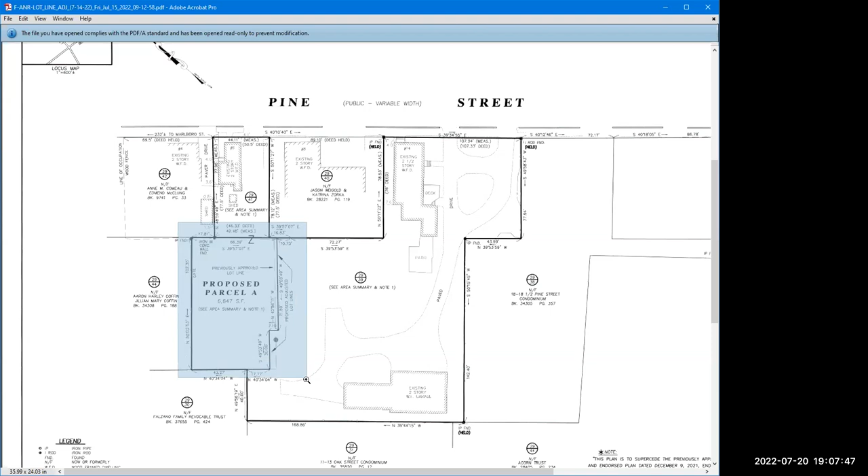Just going to zoom in on that. This very slight adjustment right here, just to accommodate this feature here. So that's all they're doing, is to change that alignment from the plan as it was previously aligned. And the office recommends endorsement of the plan. Any questions or comments?

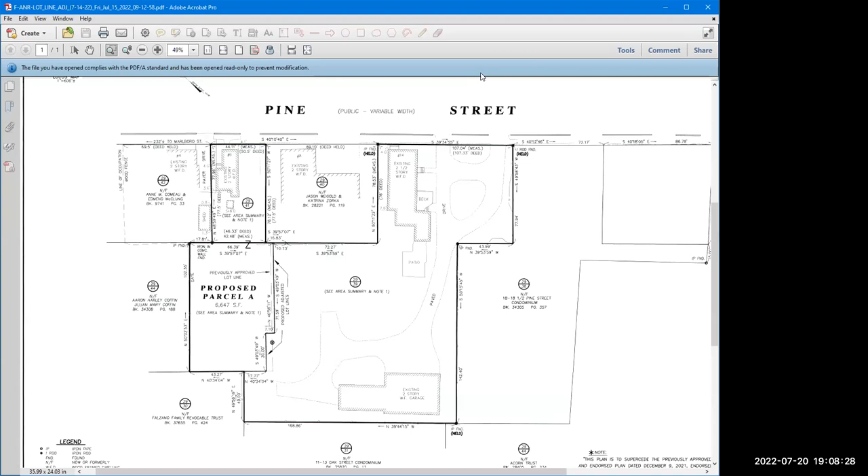I'll take the motion to approve. To endorse, sorry. I move to endorse the plan. Second. Okay, I'll call roll. Alden, yes. Beth, yes. Bob, yes. Heather, yes. Rick, yes. Richard? Hello, Richard. I muted myself, yes, sorry. Yes. Okay, Bonnie, yes. So that's endorsed and good to go.

Now, request for minor modification at 13 Doyle Drive. We don't have anybody here representing the applicant. They were going to show up tonight, right? Correct, I believe they're online. Vincent, do you want to address the board? I can pull up the plan and any other visuals that we have that you've submitted. Sure, that'd be great.

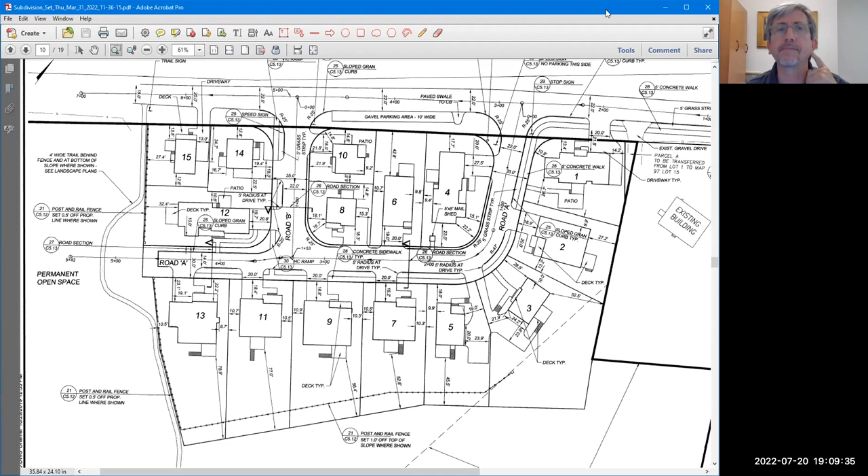Let me start with the context of the subdivision, just so everybody knows what lot it is that we're talking about. Can you all hear me? Yes, okay, sorry, we have to talk very close to these microphones. So this is the plan of the OSRD Colby Farm Lane. I'm zoomed in here to the lots that are for development purposes, not the open space surrounding it, which you can see at the bottom. The lot in question is actually this lot right here, so we'll be taking a look at the layout of that one in just a moment. I'm just going to switch to that.

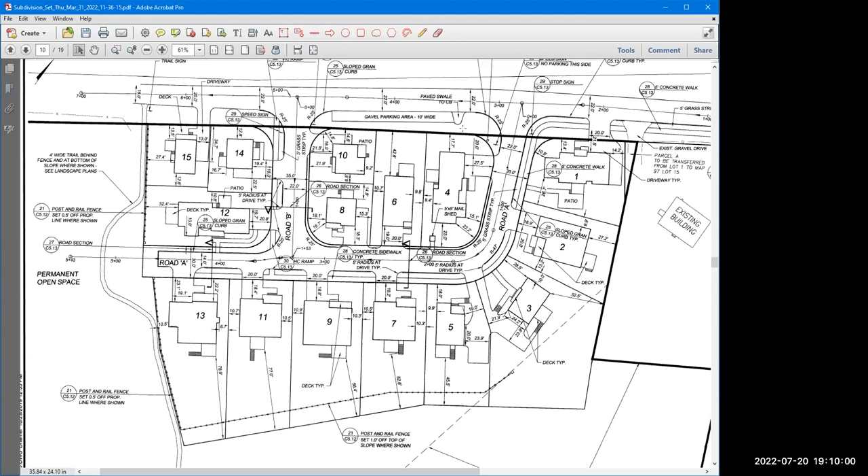And then Vincent, did you want to give an overview from this plan here of your lot, of what you'd like to do for the board? Yeah, so the kind of rectangular yellow figure right there, we're looking to put in, it's essentially a plunge pool. It's kind of small, but it's 13 feet long, 7 feet wide. It's within setbacks, and it's just going to be set off from the side of our deck, which you can see on the plan there. It's 3 feet into the ground, so it's really more of a, I guess you'd call it a glorified hot tub. That's a little nicer.

Sorry, I was just looking for a graphic that you had submitted. No? We did. Sorry, got a crying baby here. No, that's quite right. I thought you had actually submitted a rendering and that we had it here. We did, yeah, I could try to look for it again, Andy, if you need us to resend it. That's right, I'm not seeing it here.

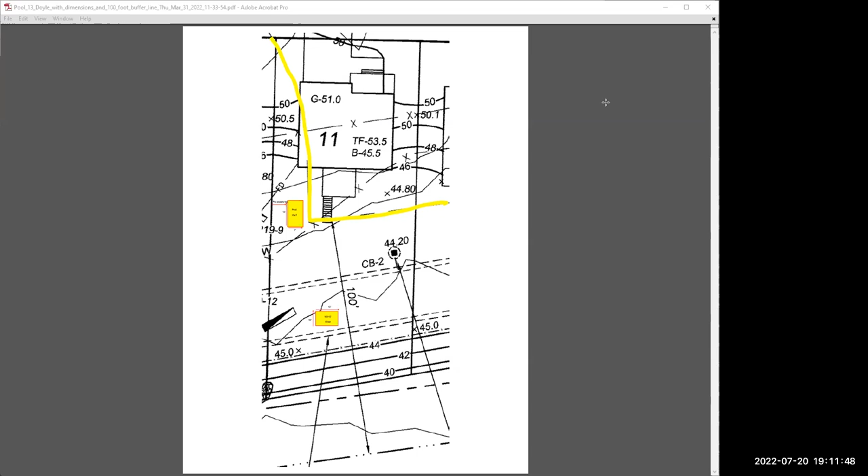Essentially, within the setbacks, we're just looking to put this in, and our HOA has approved it. I believe Dave Daly, who's a developer who still has the open permit, has co-signed it as a minor modification. So we're just looking for approval to put that in, if at all possible. Thank you.

For the board, as mentioned in the staff report, part of the reason the applicant's here is because with these smaller lots in the OSRDs, applicants are looking for a waiver of elements that might be placed within the 100 feet of the wetland resource area. That goes back to a provision in the zoning ordinance, so the board just has to review and approve that. I had an exchange with the conservation administrator, and it's our understanding that the commission, although it hasn't formally approved this yet, does not anticipate having any issues with it.

In fact, the issue attempted to be resolved in the prior weeks leading up to now, and Vincent knows this because he's been waiting on hold, is that Daley's been finishing some punch list issues. Daley agreed to sign on to this and add it in reference to their open permits, so we would not have any open overlapping permits between the owners of this lot and the developer who's still completing their punch list. So the Conservation Commission is expected to review and approve the same plan you see here.

Could you clarify on the diagram where the 100 feet back from the wetland buffer area line is? Sure, so this distance right here is 100 feet from the wetland, which is down here, to the rear of the lot. There's a 100-foot marker right near the shed, labeling this line going up. So that's the 100 foot line from the wetland, and the pool is right on the edge of that. Yeah, so if you look, it's just labeling that line right there. But where the pool is, it does require a waiver.

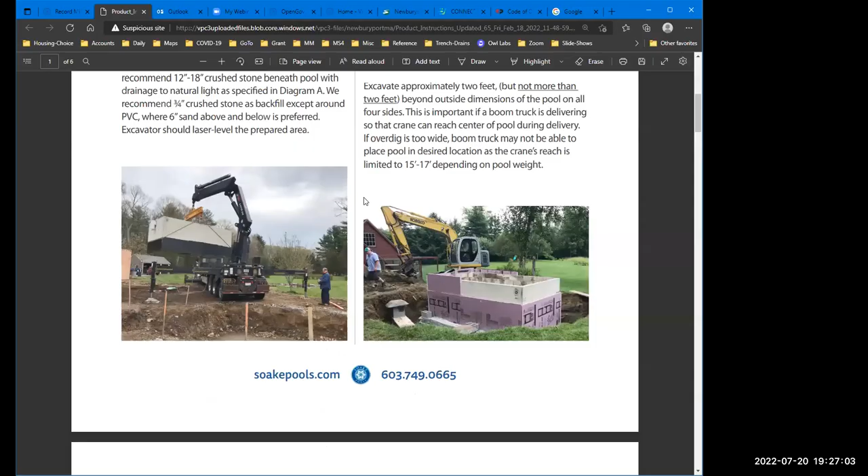This is that graphic I wasn't able to locate. Oh yeah, this gives you an idea of the scale. Obviously, most of this is submerged.

Can I ask a follow-up question? I noticed that there was also going to be the addition of pavers and a fence. I'm just wondering if there are dimensions for if there's going to be a patio surrounding the pool.

Yeah, we're actually just going to do a little catwalk around it, which would probably be about 18 inches of pavers around the perimeter of the pool itself. The pool also comes with a cover with a lock, which we'll have on, but we're also putting a fence between us and the neighbor to be in compliance with fencing requirements for pools.

Is there lighting in the pool? Will there be lighting? Yeah, we'll have just kind of little lights around it for safety reasons and ambient lighting at night. And the pool itself, I believe, has a light in it as well.

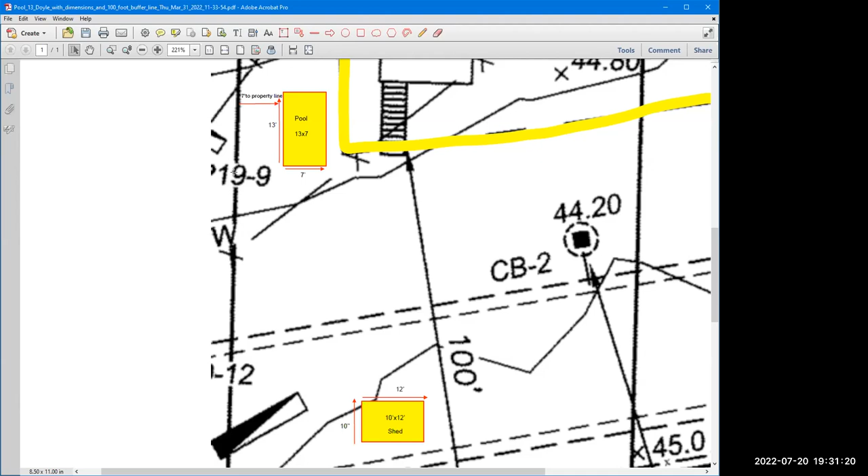But it's not shown on that. That's correct, it's not shown here, no. I do know that the applicant has spoken with Jennifer and with Caitlin, and I had asked for a plan that shows sufficiently - this is what resulted from that discussion about a plan of the improvements.

Let me try with a motion. Well, are there other people who want to speak? I don't want to just limit it to us. Richard, do you have anything to add? No, I've been listening intently. Bob? Nothing to add, Bonnie. No.

So I'll make this motion and we'll see where it goes. The motion is to consider the request for modification minor, to approve said minor modification request and waiver request for 13 Doyle Drive pursuant to the Newburyport zoning ordinance section 14J822, with the condition that no swimming pool permit shall be issued until the Conservation Commission approves a certificate of compliance for the original OSRD subdivision.

And also, actually, I thought this was saying the opposite of what you were saying. Sorry, I interrupted. It says no permits can be issued until they comply with all the conditions. That is the language suggested in the staff report. Well, let's keep it in there. Okay, so it approves the certificate of compliance for the original OSRD subdivision and also approves the instant waiver request to build a pool at 13 Doyle Drive within the 100-foot wetland buffer of this OSRD.

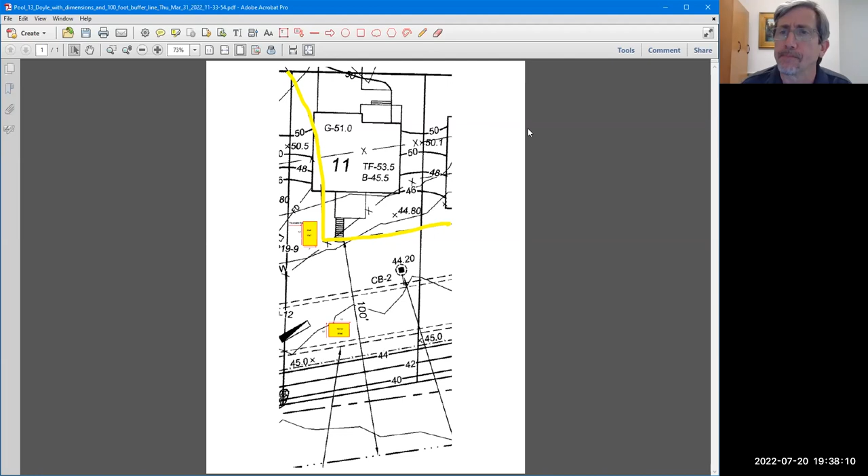I guess, what are the concerns? I'd like to know the environmental concerns, what the actual concerns are. I'd like a list of them. Yes, so would we. We are concerned because we are not experts on this, and we want to have the advice of the Conservation Commission.

So you're basically concerned about a 3-foot deep hole in our yard? Look, we don't have any more information than you do about the environmental impacts. We want to make the right decision, because this is the kind of decision that can set precedent for other applicants.

Other applicants who say, oh, you let them go into the buffer zone, now you're saying we can't do that. So we are not the experts on the environmental impact of building in or significantly disturbing land in the buffer area. So we would like you to go to the Conservation Commission and get their approval first, which is what we had agreed to do back when you first put in this application to us. And we would feel a whole lot more comfortable moving forward with their expertise telling us what's the right thing to do here.

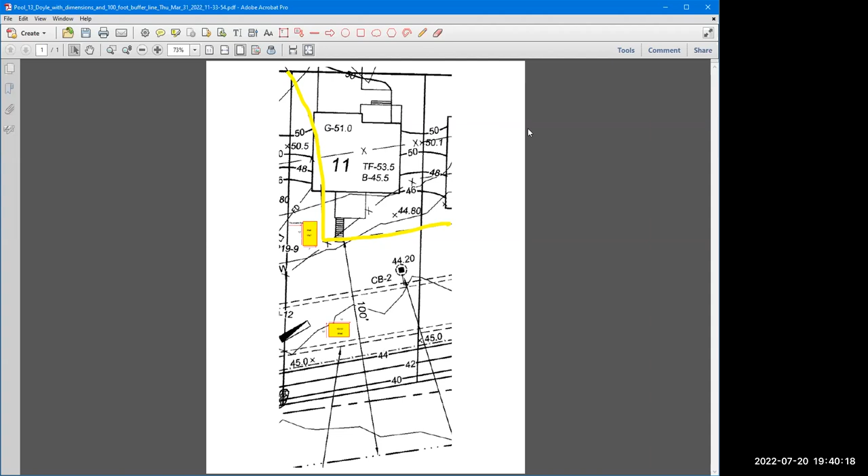So we'll move on to the next application on our general business, which is a request for a minor modification at 25 Duffy Drive. And we have the applicant with us, who's been very patiently waiting. Thank you so much. Just a moment.

Andy, is the mic on up there so you can speak into it? Yes, if you speak in the mic, that should be working. Yes, you're on, go for it. So you are David Green from 25 Duffy Drive, wonderful. Tell us what you want to do.

Well, we are looking at an existing patio we have in the backyard. We wanted to put in a 14-foot by 14-foot hexagon shaped pavilion, and once again, it's on an existing patio area. That's pretty much a basic picture of what he's got there, except ours would have 6 posts with the hexagon. There would be one leader in there, it's not showing me it's drawn, but anyway, it'd be 14 by 14, so it's a little bit less than 200 square feet. And from what I was told, it would go right over where that rounded area is.

It fits, it would fit right in there without adding or doing anything different to that. And that was the way it was when we moved into the house, when we bought the house, which you saw in the picture. And I guess the concern was that there was roof lot coverage or roof space or something of that nature. So we're just deciding now if we can get approved for the pavilion as requested, or if not, we would like to put in a pergola, which wouldn't have a roof. I've got the information on that also. If you look at the shape, it would be a rectangular shape, and it would also be placed in that exact same area.

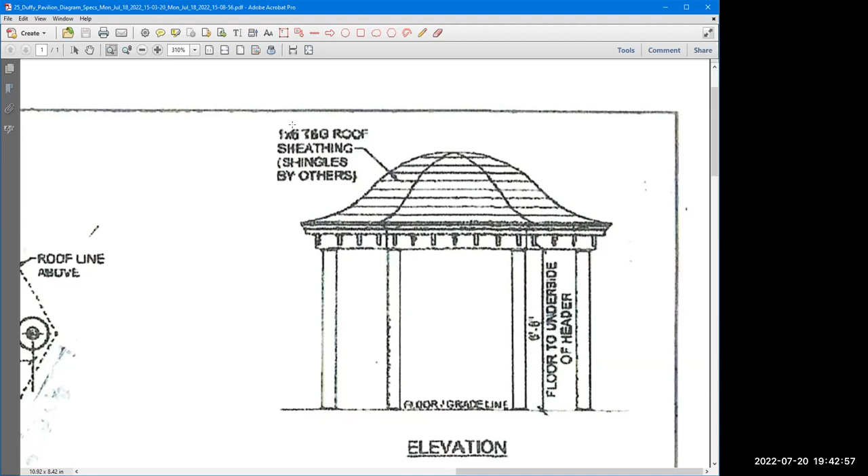There would be 6 post holes holding up the pavilion that would have a roof on it. The pergola would be probably 12-foot by 16-foot, shown on that drawing right there. That would have 4 poles, which again would go in the same area, but would have an open roof style, like that, as opposed to an actual roof.

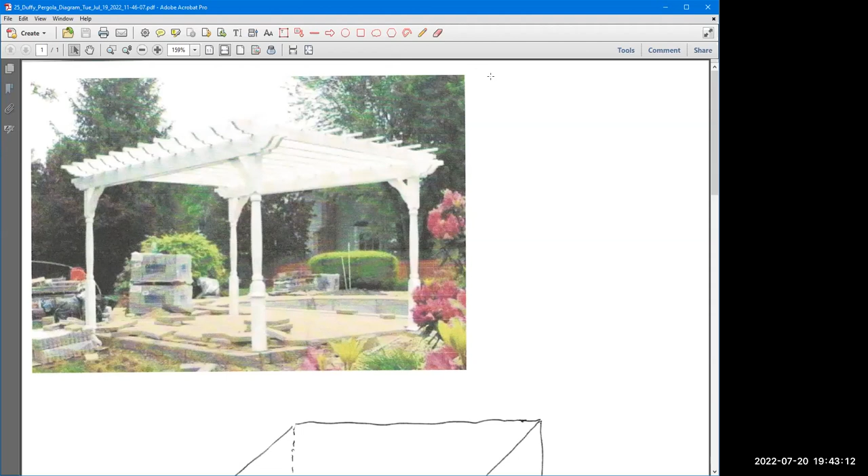To my knowledge, the roof space itself was the concern. We have a ranch style house, so for our lot size there's already quite a bit of roof space taken up. There's something about 25% that either Jennifer or Caitlin mentioned. Then they got back to me the other day and said, with this 5% overage, maybe the board can take a look at it and see what you folks think. So I guess I'm here just to find out what you may approve. Ideally, we'd like the pavilion. If not, the pergola would be fine.

And no, I'm not going to ask for a pool. You're not in a buffer area. Okay. Comments from anybody?

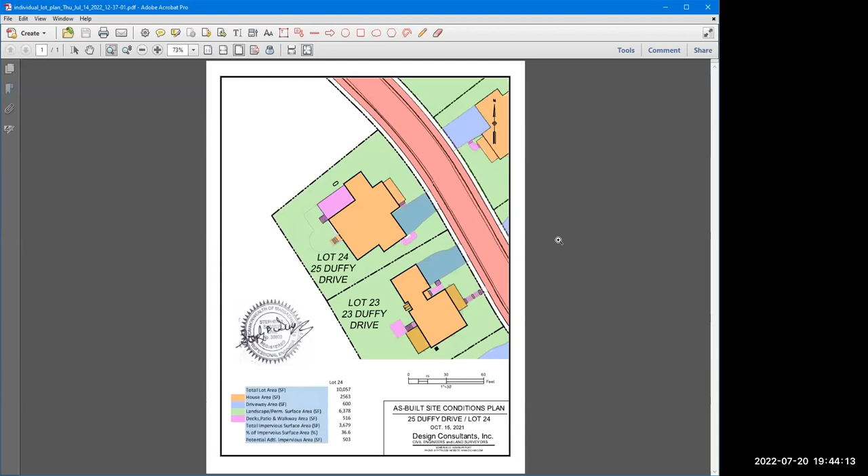Question, maybe for Andy. When reading the staff report, it sounds like it's well under the 503 square feet. It's listed here. Is that the same thing as the 5%? It's within that. What is the 503 square feet? Where does that come from? It says that 500 square feet of additional impervious material is permitted for the HOA document. So I'm wondering where that 503 comes from.

There was a spreadsheet provided to the zoning administrator. This is going back some time, and I don't recall whether you were aware. So this is the 5%, this is within that. So this structure with a roof is less than the 500, and it's also less than 5%. So this change is allowable for the HOA document, which the planning board had previously approved. Thank you.

And in fact, if it was just the cover, that would not be something that has to come before the planning board. Here, it's because the structure itself is creating more massing, more impervious surface, right? I think it is, yeah.

So just a question then maybe for Andy as well. Given the structure with the roof, and the concern over the runoff from that, isn't that just going onto the patio?

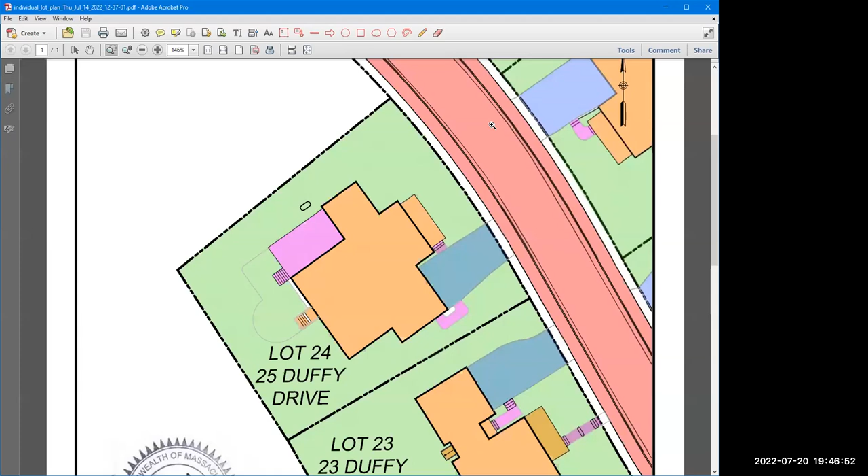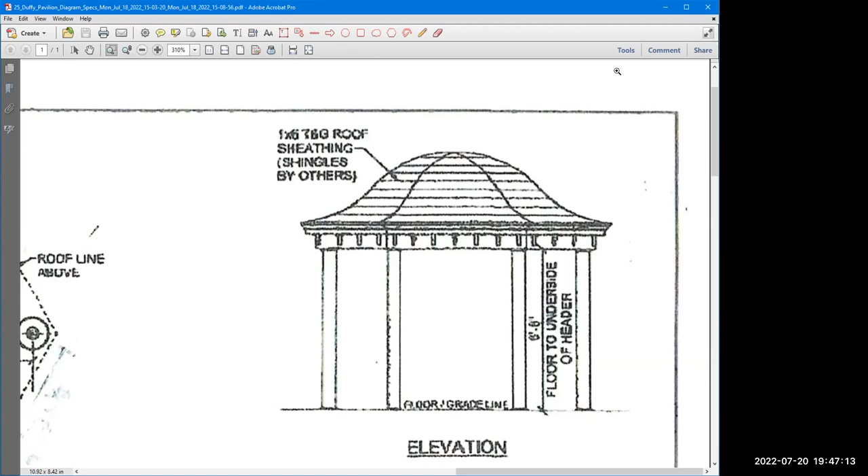Richard, can I go to you and ask for your comments? I believe it meets the criteria and I would endorse approving — for which structure? — the more simplified structure if possible, the second sketch that we saw. Okay, the second option, the pergola rather than the pavilion, and you're right, it's more in keeping, so...

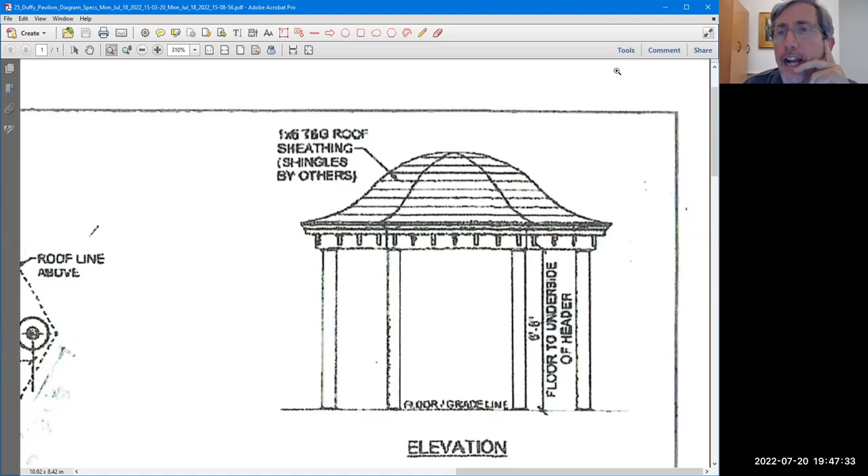It's more — I'm sorry, it's very hard to hear you — in keeping with the design intent, but we're limited to what we can react to, so it's a best decision based on the material in front of us. That image is more compelling — the simple pergola. Okay.

Bob, do you have any comments? No additional comments, Bonnie. No. Okay.

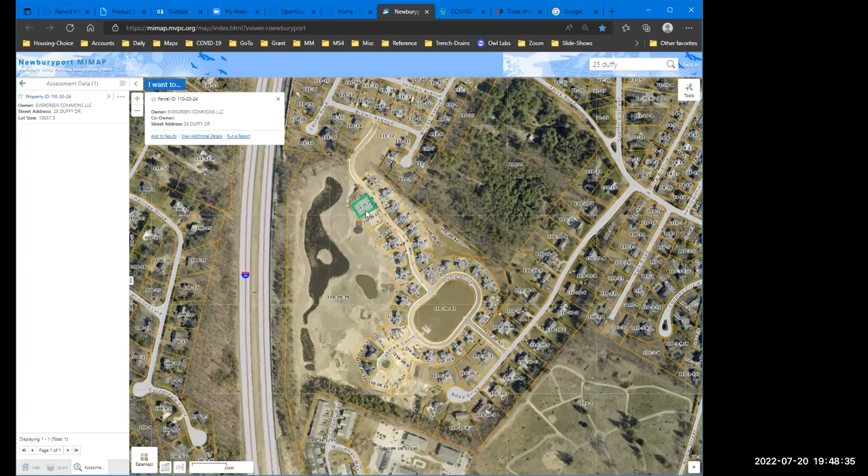There's also a view looking the other way. Yeah, there's nobody to the left of us, nobody behind us. We're on the old golf course there. So that's all open, our yard goes back well beyond where that patio ended, another 10 feet beyond that. So we're not anywhere near the border, if you will.

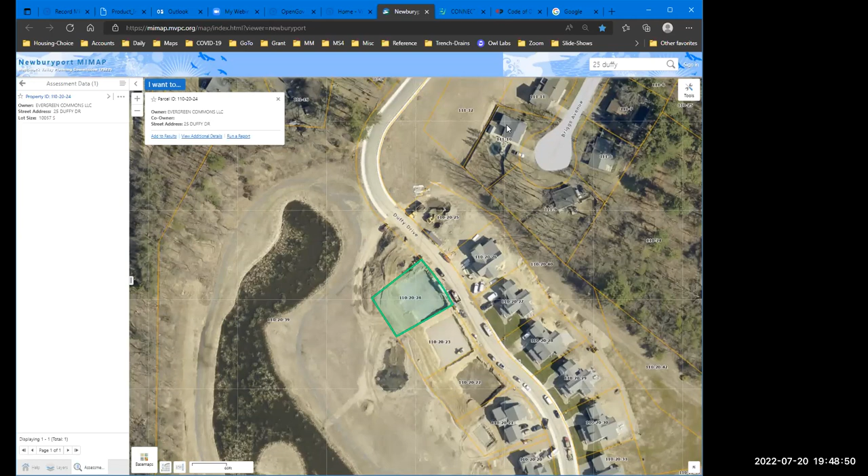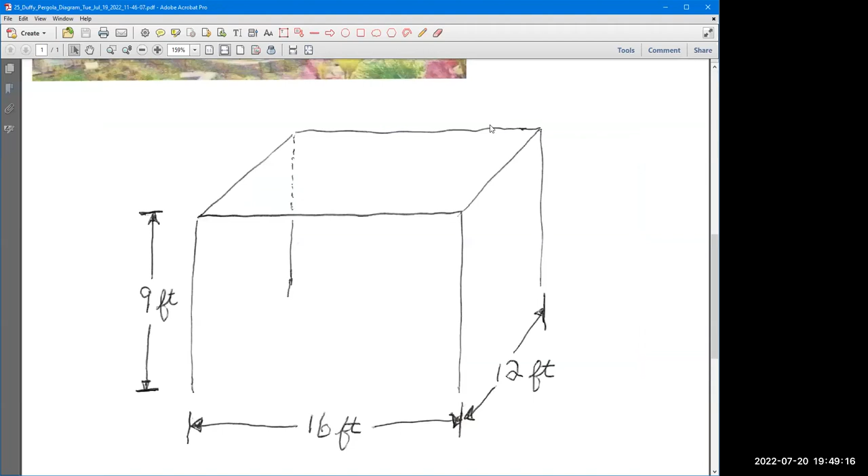Can I just ask for the height of each? How is the pergola measured, and the other structure? So the pergola is 9 feet. And what was the height of the pavilion? It would be basically the same ceiling height, but where you see that dome roof, I guess they call it, would be about 11 and a half, 12 feet.

The pavilion's gonna feel bigger. It's gonna have a much greater presence, if you will, less transparent. What's the word I'm looking for, Bob? Let's see, less open. There we go. Thank you, Bob.

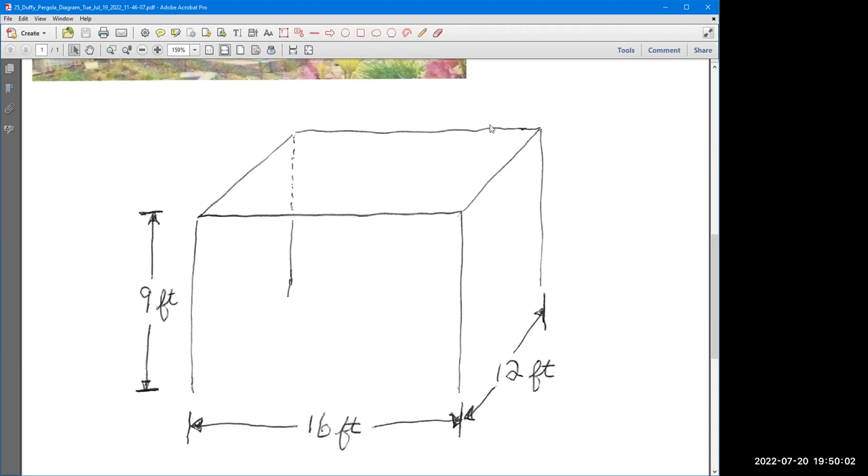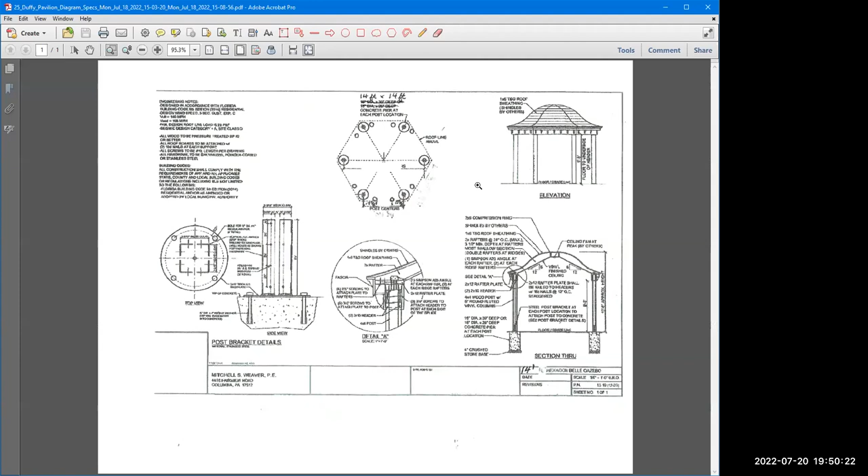I'm sort of leaning toward what Richard was saying, that the impact of the roof structure and all the structure of the whole thing is much more significant. Trying not to find a pejorative word, but in comparison to the pavilion, the pergola is open, you can have plantings over it, and while it might cover the same amount of space, visually it feels more in keeping with the open space around there and your house. So I'm leaning in that direction, if you're saying one or the other is okay with you.

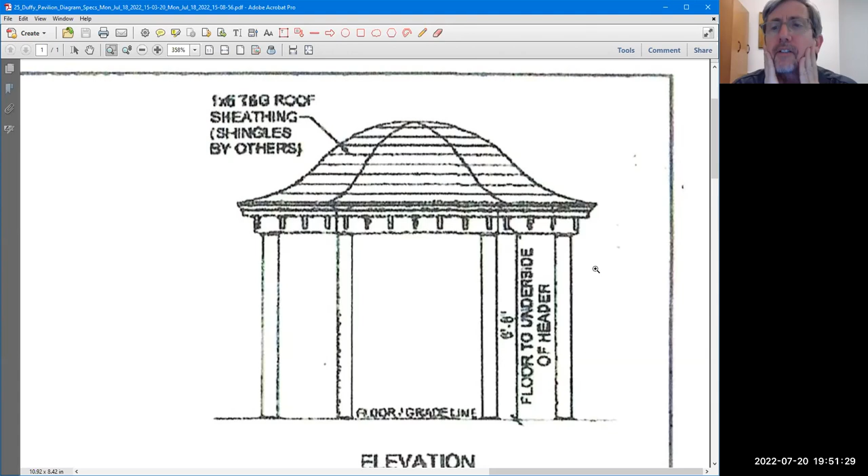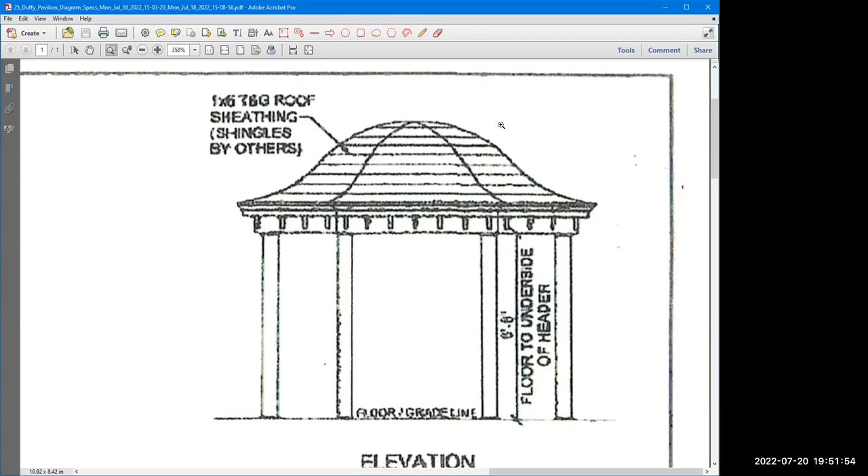Well, we really wanted the pavilion, it's not that one or the other was fine, we basically put in for the pavilion and went back and forth with Jennifer and, I think Diane, and Caitlin. They recommended we still give it a try because that's what we wanted, but she said at one time that they weren't going to approve it. Then they found this zoning information that we just mentioned, and I had no idea about that. I wish we would have found that out a month ago when I first started asking for the permit. But it all kind of got changed up and they were hemming and hawing, saying the pavilion might not work. So we would prefer the pavilion, that's all.

Richard, I hear you want to speak again. Just to comment and add to what you had just provided, the pavilion has a sense of formality and ornateness which I don't think is in keeping. If you were to bring up the existing photographs of the home and the patio, the trellis offers a little more informality and a little more open, and I think is more in keeping with the adjacent structure. I don't know if you want to share the photograph. Yeah, that captures what I was struggling with. Thank you. You're welcome.

Yeah, we mainly wanted it for a shade thing in the back, to have some shade back there. So with one of these things, we could get those screens that close up. Sure, that would be fine. I just want to get the approval for one or the other.

So part of the discussion here is about adding impervious coverage. But if it were the pergola, would they still need the minor modification for the unroofed structure of the pergola? I'm not convinced that that is necessarily needed here. Again, I defer to the zoning administrator, but I think your inclination is correct that it is a precautionary measure. It might be beneficial to approve, but technically speaking, probably not, because it's not enclosed. So the permission is not so much for accessory structure as it is for a covered accessory structure. Correct.

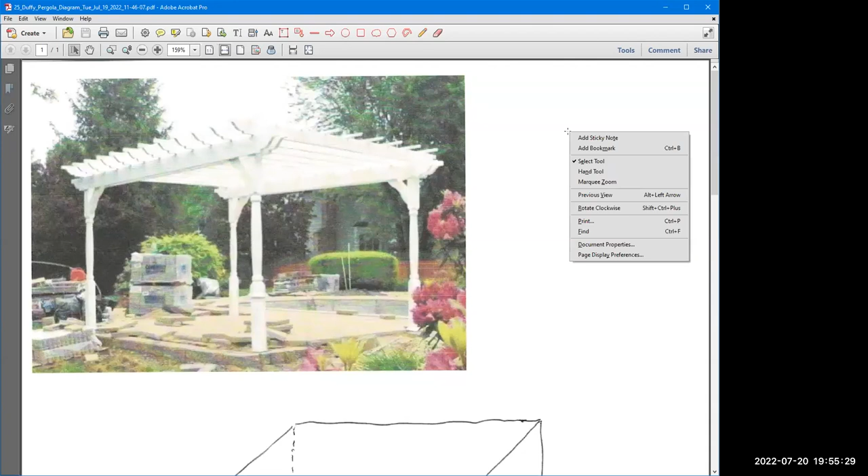Right. So when we make the motion, we have to know which structure we're making it for. Let's start with the pavilion, because that's the applicant's preference. I don't know if it specifies that in this wording here. We can assume the planning board would specify that. Yep, just add it in.

What are the two motions? One, preferred minor modification, the other... Yeah, sure, okay, let's just have a motion. I'd like to make a motion to consider the request for minor modification, minor. I'll second.

Writing and thinking and calling names. Yeah, don't get, gotta get up at 6 in the morning to do all these notes.

Okay, so the motion is to consider this a minor modification. And I'll take a roll on that. Alden, yes. Beth, yes. Bob, yes. Heather, yes. Rick, yes. Richard, yes. Bonnie, yes.

So we keep it in here with us, and now we make a decision on what we are going to approve as a structure. The applicant's preference is to go for the pavilion first, with the roof on it. So I'll take a motion to that effect, that the motion is to approve the minor modification request for a pavilion. And just to clarify, if this motion doesn't carry, then we can move on to the second.

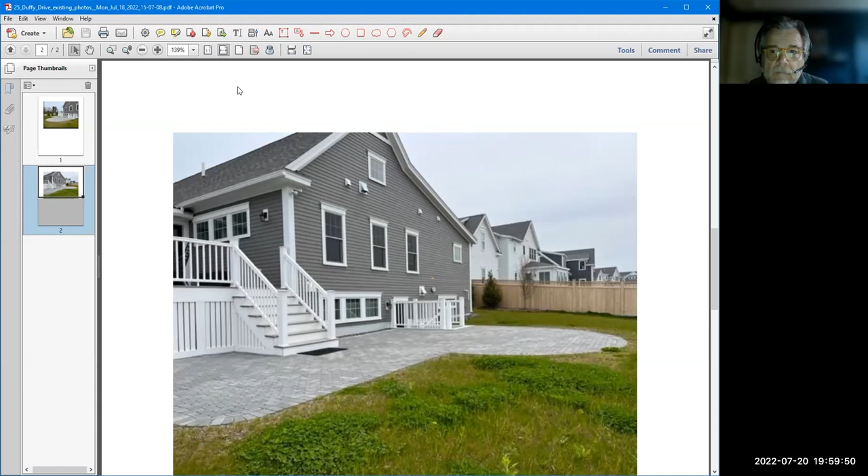You want to move forward, okay. So, pergola, motion is Rick, and Beth is the second. And let's do another roll call. Alden, yes. Beth, yes. Bob, yes. Heather, yes. Rick, yes. Richard, yes, Bonnie, yes. You got yourself a pergola.

When are you installing? So this will get, it has to be signed and recorded first, right, before they can pull a permit? Yeah, we can take care of this very quickly, of course, but we'll look at the formality of the certificate here signed. And that way it can pass on to the zoning administrator and the building commissioner.

So where do I do that? You'd want to follow up with Caitlin tomorrow morning. Yeah, she's the one, we'll follow up on the language here, but she's going to be printing that out and having it signed and filed. Yep, okay. Wonderful, thank you very much.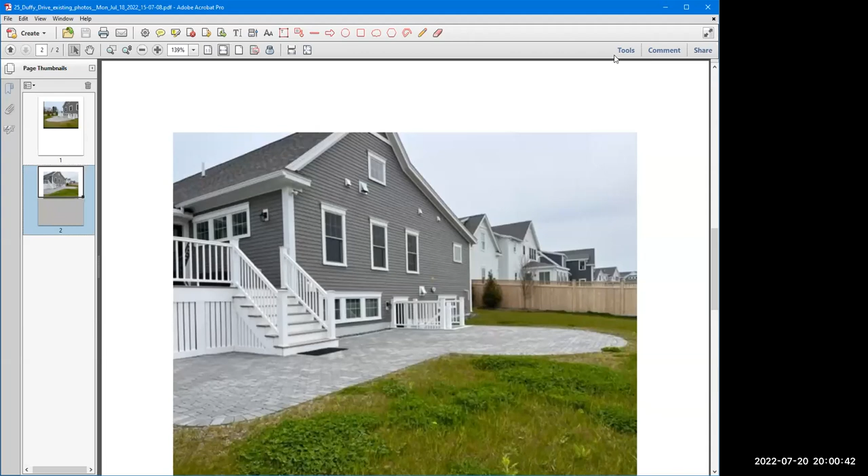All right, where are we on the agenda? We have Market Landing. Are we entering our informal now?

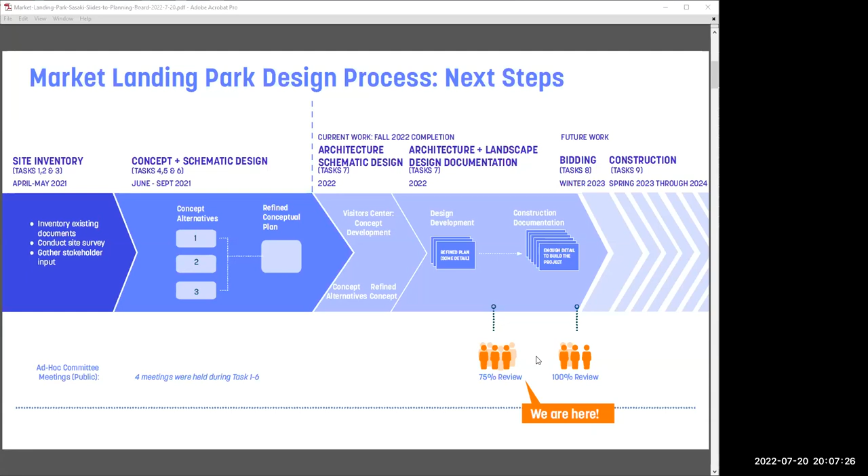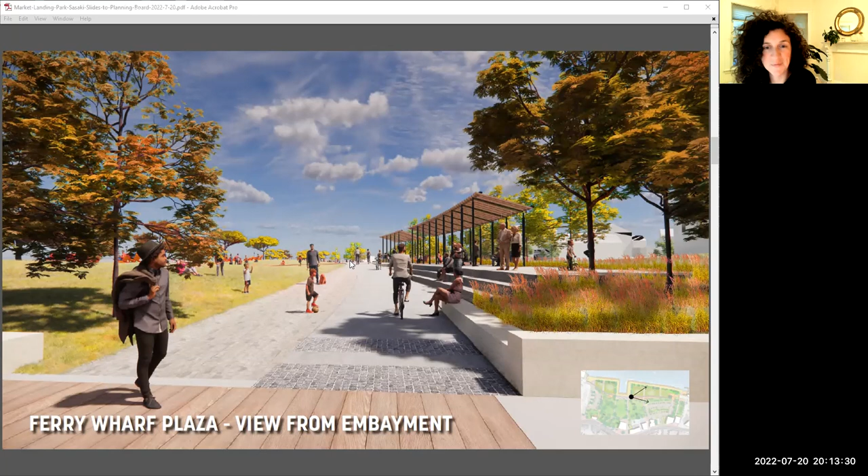And so we just have a few eye-level views. Go ahead. Oh, no, Marin, I was going to offer, if it's okay with you, not to step on your toes - it might be helpful only because they might be having an easier time hearing me. Sure, it's all right, I might review these if that's okay. Okay, sorry, just because it might be easier.

These are some excellent vantage points that Sasaki has made for the project. Obviously these get refined as we go along, but this is meant to show that as you're looking from the central embayment area east through that, you'll see that lawn space behind the berm being created. The pedestrian walkway is being cut through the granite there - there will be an opening where there currently isn't one. We'll have to remove an electrical transformer and some other equipment back here to do that.

And then there'll be some steps leading up to some raised swing elements - we have some more graphics for that - but this will be, I think, a very nice seating area for folks. We're also looking for some fundraising for those above-ground elements as requested by the council. There will be a series of 12 to 16 of these swings that folks can sit on, with sort of an architectural element, kind of like the pergola you saw earlier tonight.

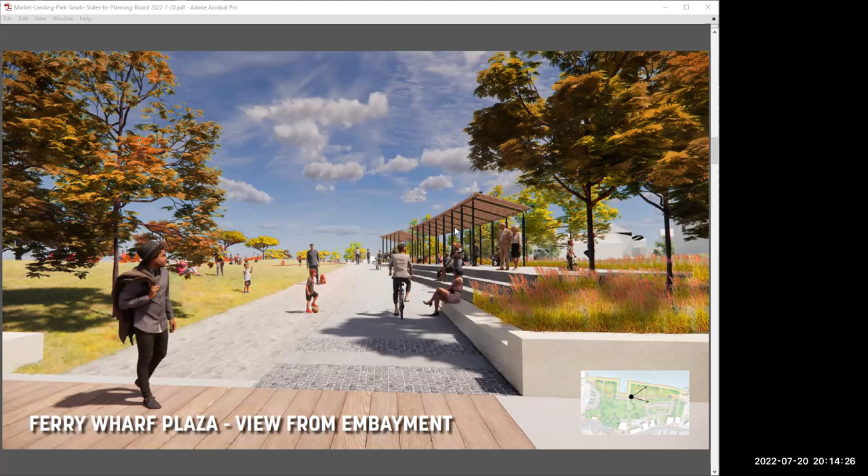This is a view down Ferry Wharf Way through the middle of that. So you see the structure on both sides. The structure might be a slight variation on this, but this is to give you an idea of what that experience would be like.

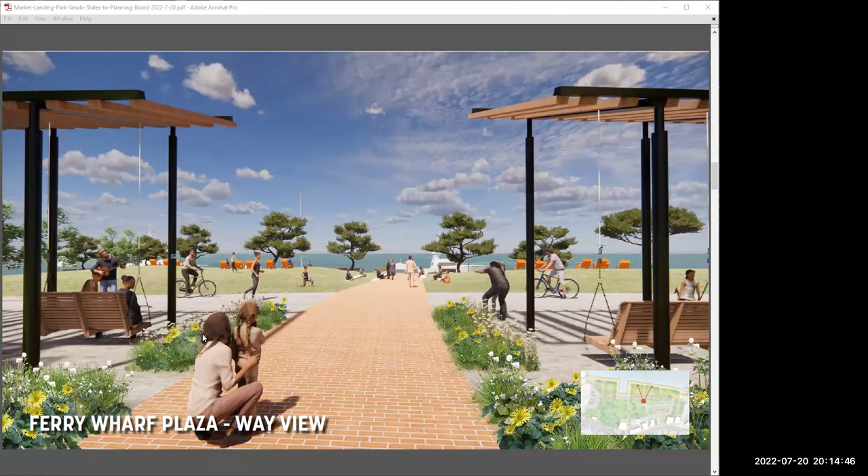Behind that, by the way, you can see the shared use path crossing through the raised lawn space, and behind that is where the swing sets are.

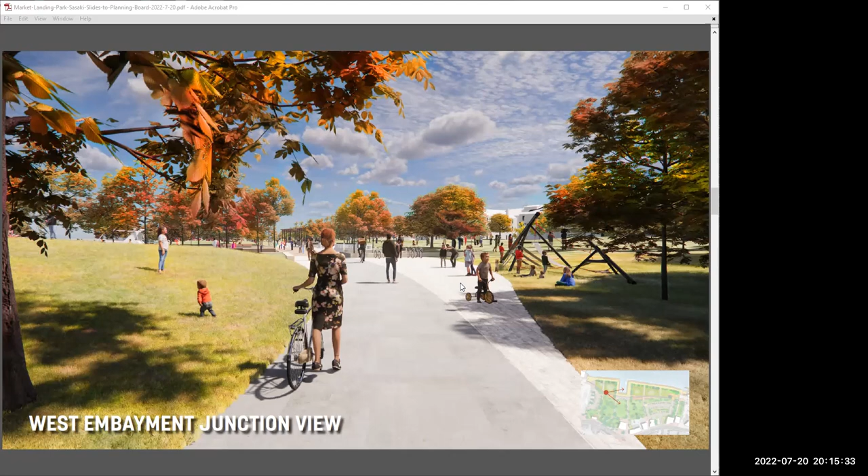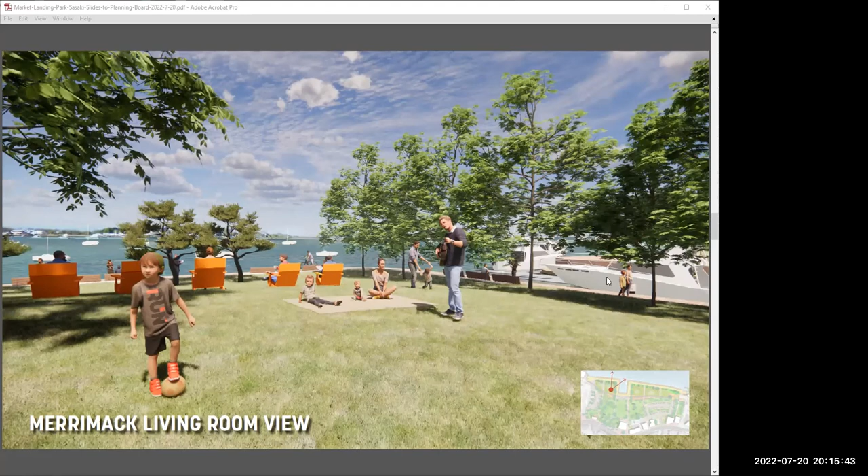This is a viewpoint from the raised lawn space behind the berm. So you're looking at the central embayment over here on your right, and on your left is just the Merrimack River.

This is an area we've had to do some work recently on. We've spent a fair amount of time early this year with the city council and its ad hoc committee on this, so relatively recently we've been able to refine this.

This is the area by Merrimack Street where the new facility will go. The trailer facility is about here, and the shed maybe sort of about there. We're putting a pedestrian walkway in there, so that new structure would not be able to stay there.

For those of you who've been following the project, we have had a fair amount of debate over the placement of the building, its design, and its programming. Just to review a part of that, because it's important background for you to have, knowing where the city council has directed this plan now for the most part.

We were trying to be responsive to the council's request to essentially preserve as much of the view shed, so to speak, to the water's edge. The assumption there was that a more narrow building would be preferable for that purpose, so Sasaki has obviously modified the building to be more narrow and more linear, perpendicular to the river.

That dictates some other things too, like the solar panel array alignment on the roof. But in doing so, when we shifted that to try to respond to the council's concerns, it was determined that the corner of the building anyway would end up being in the flood zone, and taking into account future sea level rise, we did not want to be placing the building in a location like that.

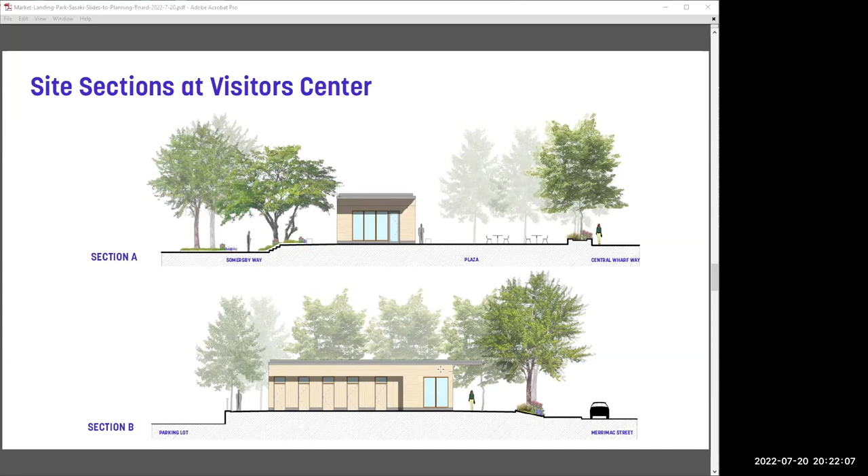These renderings haven't been updated to show the shifting or alternating between the plaza space and the building. But what you can see here is the visitor building, the glass vestibule space for the visitor booth up front, and then the restroom doors behind. We're doing the best we can to screen it with landscaping.

We have the seating space. This is the new pedestrian walkway in front of that. This is approximately the location of the existing crosswalk, so you see this sort of period lighting. This is Merrimac Street - the Browns Wharf area is just off to the left, or to the rear there.

This view is, again, if you imagine the building shifting down a little bit and the plaza shifting as well. We haven't had a chance to update the rendering since the new guidance and development of the plans, but this shows the building exterior.

You can see the lobby space there for the visitor booth, and the doors there screened in part by some vegetation. That's Somerby Way, the pedestrian way. There's a landscape buffer and some pedestrian access that will be provided.

Merrimac Street is on the right side there with some landscaping in front of the building as well. And on this plan, this is really the same sketch layout you had seen previously, but we're just showing you a bit of why we were moving the building away from that corner there, the FEMA zone.

Something we're doing here for resiliency is we've had some discussions with key reps from the resiliency committee, including Jane Healy, the chair, Julie Govertson, myself, and John Eric White, the city engineer, and a few others. We've come to agree that it makes sense to start with a 15.33 foot elevation for this building to keep it above a projected sea level rise.

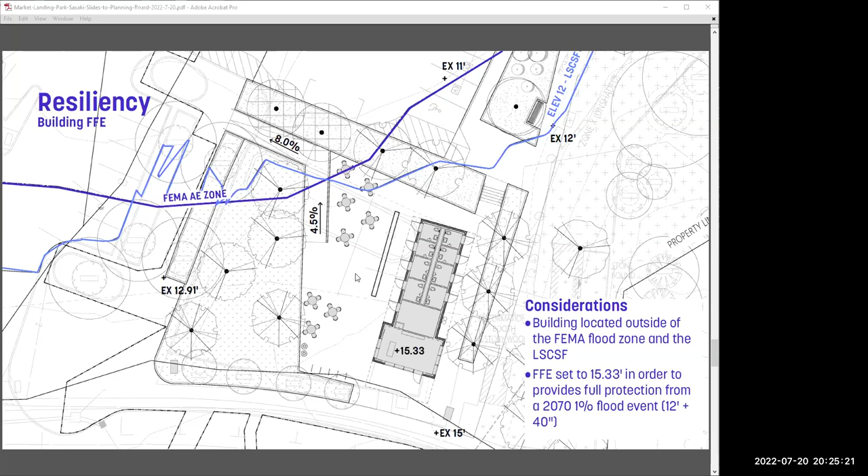Very thorough, Andy.

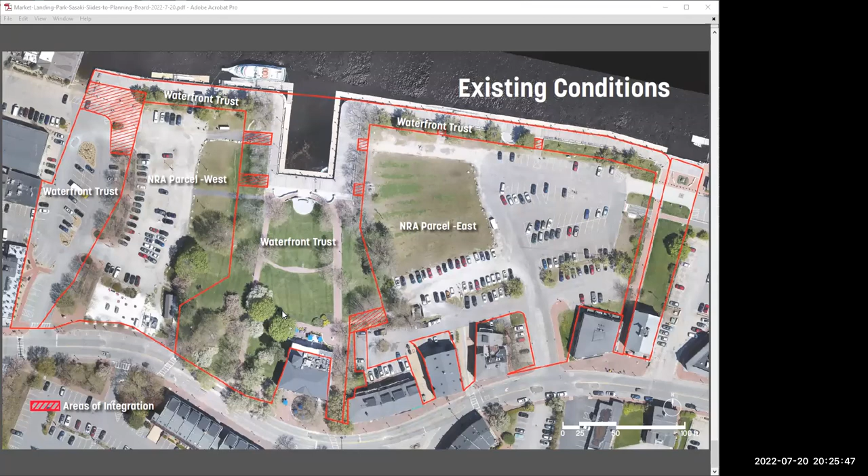So with that, we wanted to open it up for any questions you might have for us. Obviously, our goal is to come back to you with plans that address any of the concerns that you have. And we do have an aerial photograph to compare against the existing conditions, for instance the interim lawn spaces are there. So should you have any questions in context, with that I guess I turn it over to the chair.

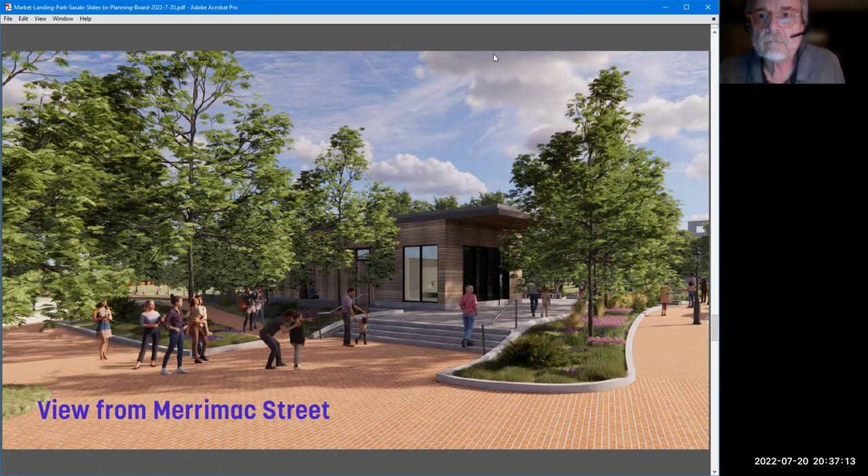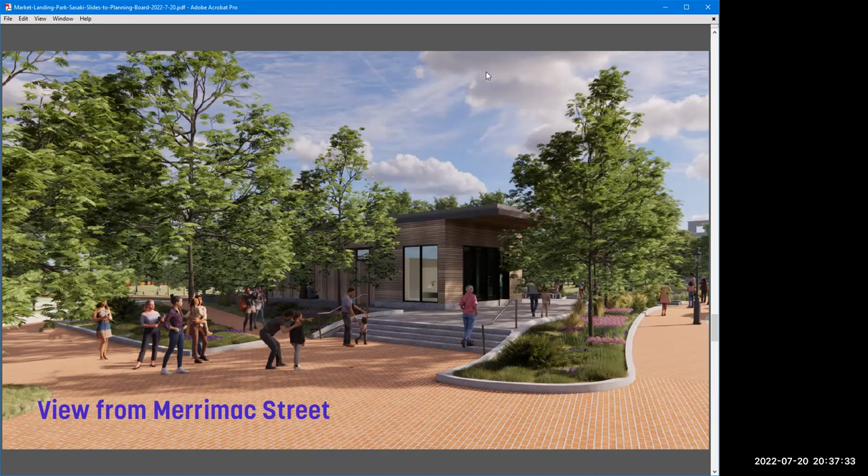I just wanted to echo the concerns about the shared use path. And with respect to bathrooms, I understand why they are the way they're proposed, and I do think the single stalls are a good idea. I'd echo, I think somebody mentioned some screening - I wonder if there's something that could be done to separate the bathroom area from the seating area, with a mural or a sculpture, something to that effect to separate those two areas.

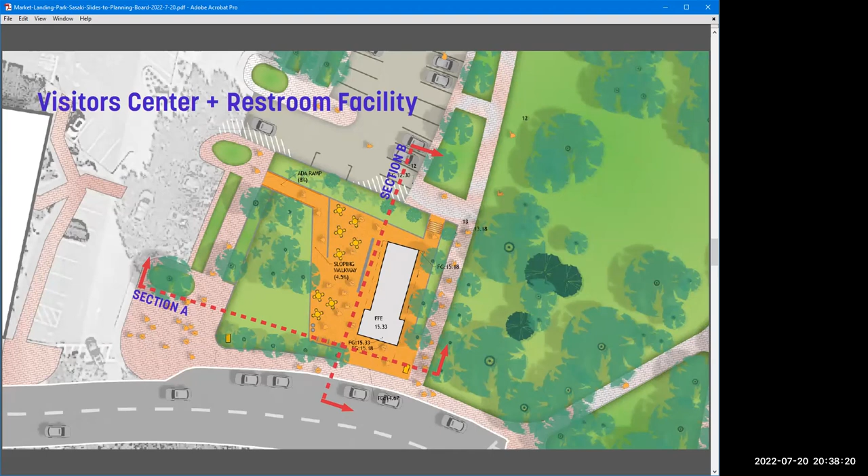I would echo Richard's comments about the visitor center. I think where I am right now with the current design is I don't think you're there yet. What I heard from Mr. Dwyer is all the right intentions, referencing materials of the waterfront, referencing a little bit of the character of Newburyport. I wouldn't get too hung up on the Federalist references for a building of this scale. I kind of think the Harbor Master's structure, which uses traditional materials in a more contemporary way, is something you could look at as well.

I also think the glass and the mullions and all of that are not feeling quite right just yet in terms of the storefront system, and I would echo all the comments about screening the entrances to the toilets themselves.

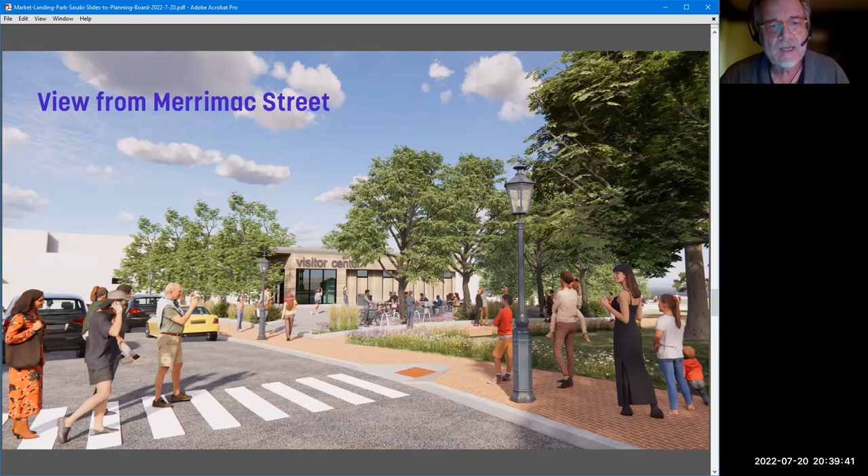Andy, if you could put the site plan back up again. I had a couple of questions about the site plan, mostly having to do with the parking. It appears the existing lot, which is to the right-hand side of the plan, has a very logical layout. I guess I'd like to understand how that is screened from the landscape area. But the layout is very logical with that lot.

Comparing that to the lot down by the Black Cow, it's a little bit difficult in this drawing to understand exactly how circulation works, but it seems like the circulation in and through the west lot is a little bit difficult, particularly the water side of that lot, if that's actually an exit. Parking lots to me need to be very simple in their geometries, and the more complex they become, the more there's potential for issues with people parking. This one seems a little bit difficult, particularly on the water side of the lot.

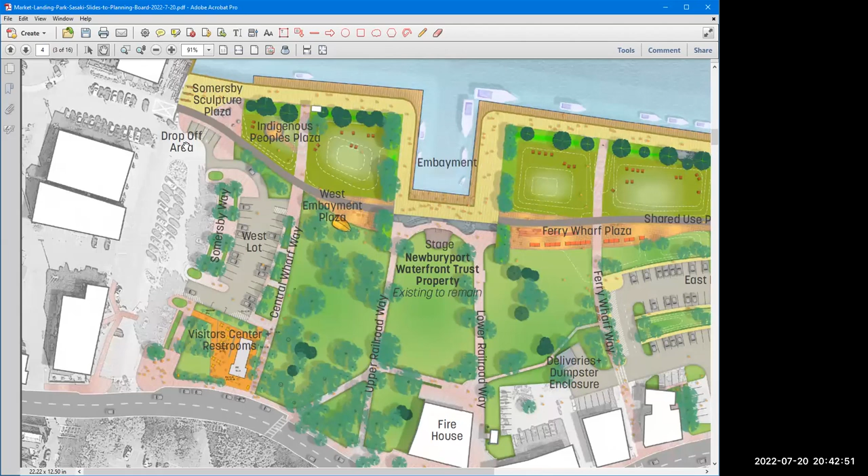Yeah, Bob, if I could, just to clarify that for you and the other members - part of it might be that unfortunately we're not showing in a line type the existing waterfront trust or Riverside Park parking lot layout, but we could perhaps add that to renderings for our formal presentation when we get there. But that layout isn't really changing. So if you're traveling through there, you do go to the right, coming down here as you normally do. The waterfront trust lot is really not changing for the most part, so in reality it's just the bottom that's changing. Other than that walkway put in front of the new Black Cow, nothing new is really being added there. The driveway that goes in here is essentially the same in terms of being able to get in, but this would be a one-way out down here, entering back into the usual cycle where the waterfront trust lot cycles around like this, so you'd be coming out here and flowing with that traffic. The waterfront trust had wanted nose-in spaces down here, and that's why those are shown here. So I don't know if that helps at all with that particular question.

It does. There just seems like there's a lot going on right in that area you were just pointing to, but I understand a little bit of the background on that now.

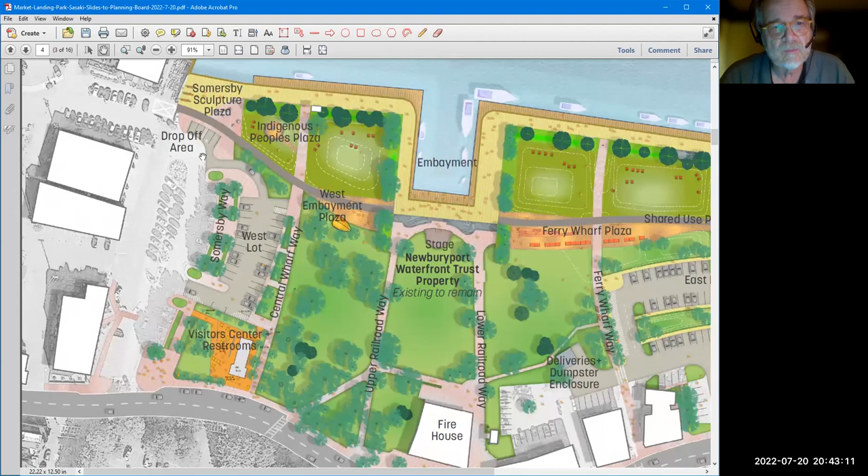Just one last question relative to year-round use of the waterfront. I know there were some comments early on when you were soliciting public comments about the working waterfront, and what happens to docks and dock storage in the wintertime. Can you address that also?

That's a great question. We didn't go into great detail on this particular area, although we have some slides for your coming presentation. The docks are generally stored here right now, and the harbor master uses a crane - I think you already know this, but maybe others don't - he reaches over with a crane to grab them, and the gangway is put in there.

We work with the harbor master, and this plan will have a shifting of the point where he's putting everything. He'll be storing the docks here - we've sized the area to make sure he can do that. The crane would reach from here, and he would have a new gangway. We'll weld a new platform for him to extend his gangways off of.

Okay, thank you. And could you address the landscape screening at the east lot? How is that screened from the park itself? Yeah, I'm going to zoom into that area, and then switch to - if Marin and her team might want to speak to it, that's fine - the landscape plan or the black and white line drawings that show this area.

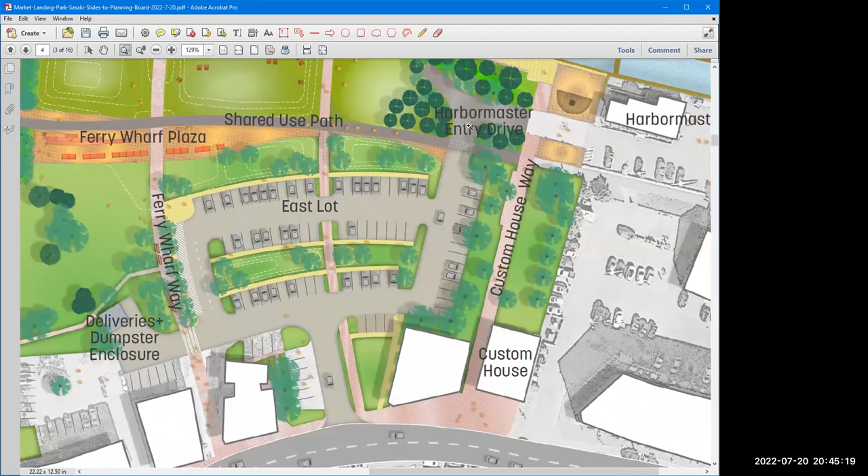So I'm going to switch to the black and white line drawing, but you can get a sense of the screening we're trying to place around that parking area. And while I pull it up, Marin, I don't know if you or any of your team want to speak to that further.

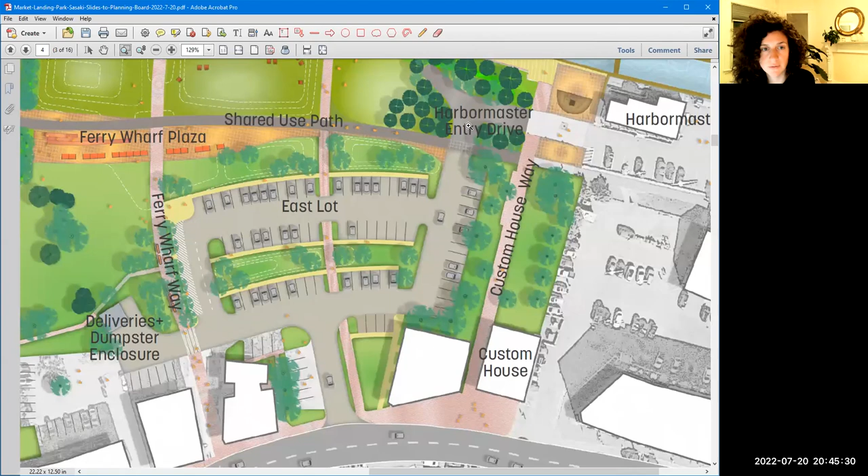Sure. In that area, we have proposed a buffer planting - a mix of deciduous and evergreen trees and multi-layered plantings, so that when you're on the shared use path, you get the sense that you're in a park and not next to the parking lot. So the intention is to screen the parking lot from the other activities.

Correct. That's really what I was asking. Okay, thank you.

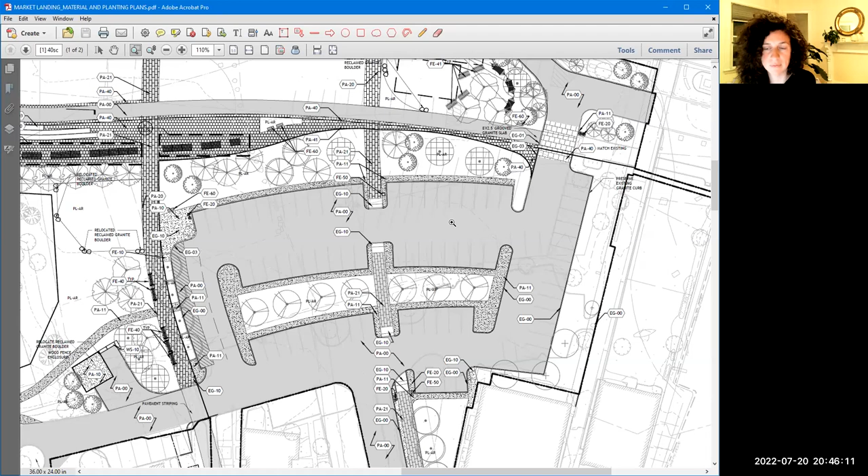Could I just respond to one comment that Rick had made earlier? Oh sorry, go ahead. Yeah sorry, it's just there's a lot to...

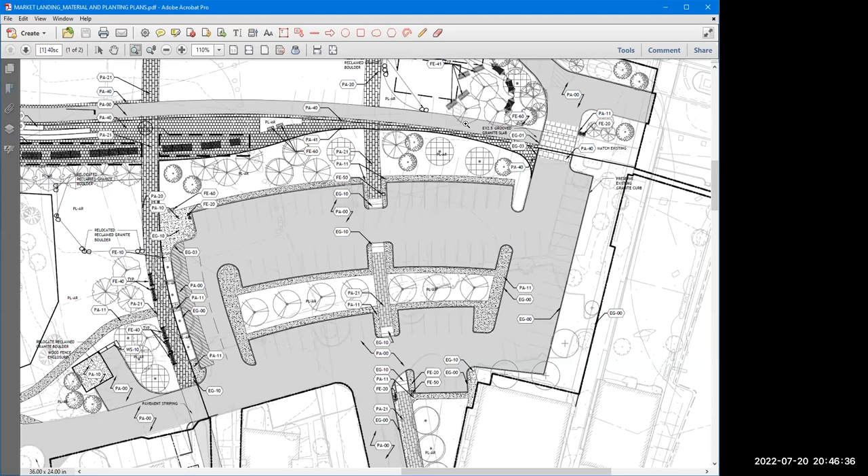I'm curious to know what the resiliency considerations are closer to the water. I noticed there were steps up from the boardwalk, and just add this to the list of things to be responded to - but just to speak to how the design will respond over time to storm surge and sea level rise. Is the whole thing sacrificial at some point? I know it was talked about the visitor center being somewhat raised, but I'd like to know what the elevations are that are considerations for the rest of the park.

And any considerations - you mentioned the Indigenous Peoples Plaza might be, I don't know, you call that lowered - is there some way it might be able to contain some of the water? So that whole business from, say, the shared use path to the water, I'm wanting to hear about. Sure, yeah. Just leave it at that - you can respond to all the other questions as well.

Okay, so we have Stephanie Quill here from BHB, who's been part of the team looking at the resiliency side and working with the Conservation Commission application, because the commission has to approve this project as well.

So we've had a fair amount of discussion about resiliency, and Stephanie may want to weigh in on this. We're doing what we can to raise park areas, and there are some diagrams we can provide in the full presentation to the board. We didn't include everything here, not wanting to overwhelm you on the informal night, but there's been an attempt here to raise some park areas as best we can without having an excessive amount of fill brought in.

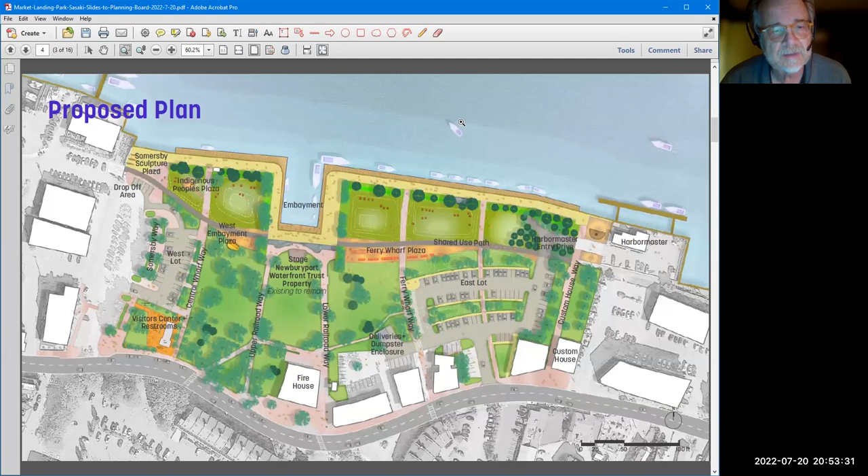Yeah, Bob, definitely, that's a good point. There has been discussion about that. I didn't speak to this earlier, but I'm going to zoom in here a little bit in this area, which isn't really shown lined up in this drawing, but it might be shown better on the black and white. Let me shift to that. It might be a little hard to see here in the black and white.

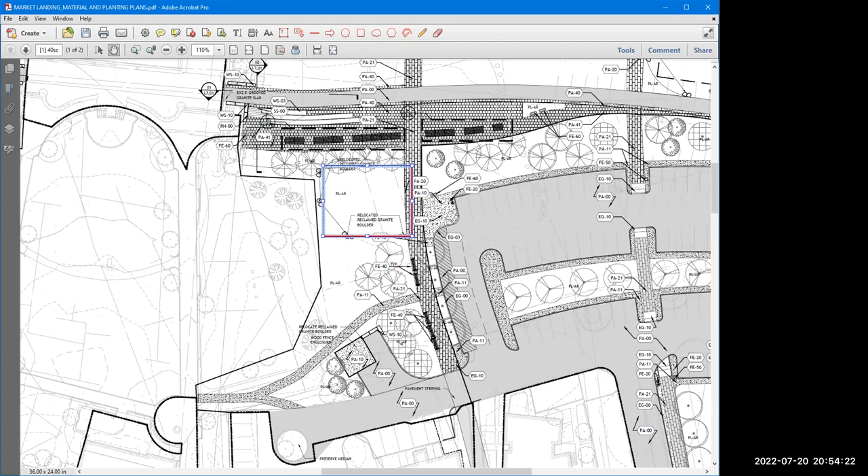So next to the east lot, what we've done is essentially try to provide some spots here for pickup and drop off for some of those events, for vehicles to park in this area next to the landscape strip and the walkway at the edge of the parking lot, as well as a temporary lawn space. This is a grass-paved type element placed underneath the grass to help support vehicles if they're placed there during the season, to have some space for that. So that's the general assumption, that it would accommodate those types of things.

Good, okay, thank you. Sure.

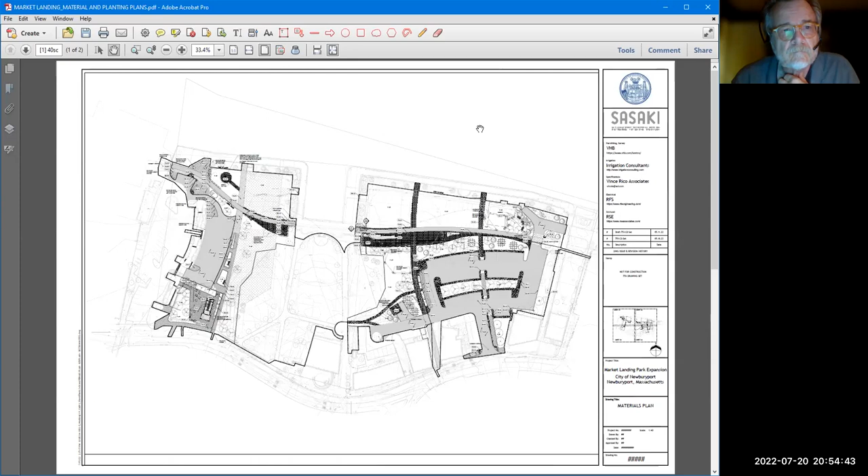Getting back to the distinction between the site plan approval and the special permit - I think Richard was suggesting this was a design process, but when we approve the special permit, it's going to be a design, not a schematic at that point. So do you think it makes sense to separate the site plan from the special permit and give more time to consider the special permit process, or do these things all have to happen together? That's the question, because we can't approve a schematic.

Yeah, understood, it's going to be final design. I appreciate the dilemma - I can see it from both sides in my capacity. There are some site integration aspects that have to be worked out now, for instance because of the proximity of Central Waterfront Way.

So if there was a general understanding or agreement relative to the building footprint, and that wasn't necessarily changing, then it might be easier to break out the building piece. But we're trying to make sure the walkway connections and so forth are worked out sufficiently for the Central Waterfront Way area. I'll ask if the Sasaki team wants to weigh in, but we have to have at least some level of detail in that area so that if we were to parse off, say, the building or the plaza area, and treat that as a separate or later review...

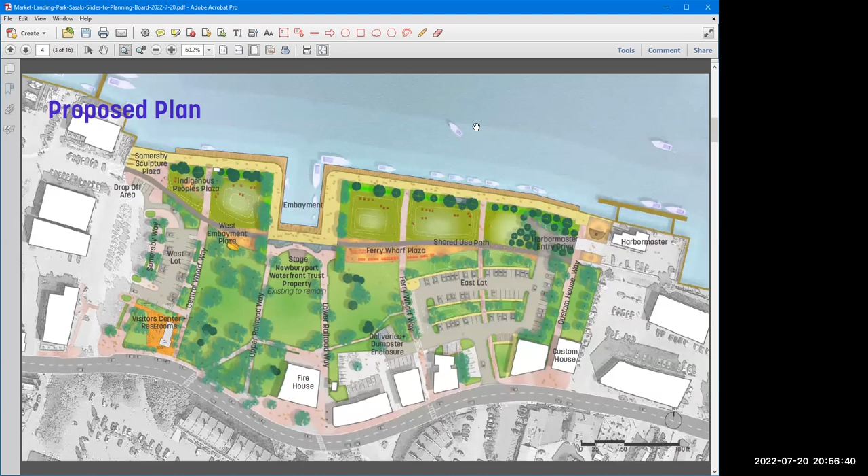One, we're under contract with Sasaki to finish the design this year and have it ready for bid, even though we're not anticipating construction of that piece, but it has to be coherently designed all at once. I don't know if the team wants to add anything - I just want to make sure we do enough on the site in that area, so that if we parse that off, we don't neglect the integration that would have to be done later or have to redo something. Marin, does your team want to offer anything on that?

I'll just point out that both the landscape and the architecture have submitted 75% construction documents, and that's the design we're reviewing now.

So in the coming weeks or months, we're basically going from that 75% - we think of it like a Mass DOT set of plans - going from 75% to 100%, which would be bid-ready plans and specs. The black and white line drawings you saw are just an excerpt of a stack of drawing sheets with the materials, plantings and so forth. Each drawing sheet shows a different thing, and there are tiled sheets for each because it's such a large site. But we have to refine those details enough that the package is ready in the coming months.

Each thing that we need to tweak here - and this is the difficult part with a project like this where there's a million different inputs - is that each time there's a revision done to something that may not have been anticipated in the scope of work originally, because of budgetary constraints and what was expected coming from the council, we might have to spend more time on the design and more money, and then push out certain features of it. So we have to work those things in.

But the current timeline is to try to go from 75%, what we got a couple of weeks ago, to 100% plans in the coming weeks or months, so that it's actually ready for bid, at least the park elements of it. And we don't want to leave edges of it in a situation where we're finding out we need to shift things later because of things that were excluded from the plan review now.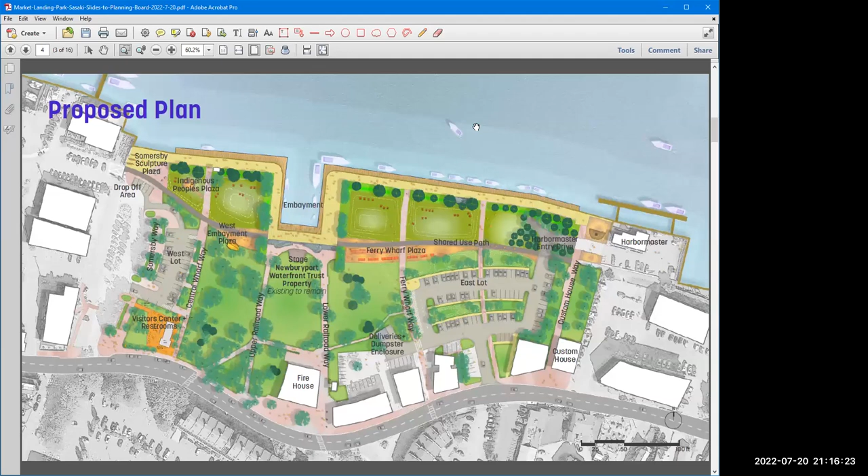All right, thank you. Minutes. Clarify this list here, it's incorrect. On 5/4/22 there was no recording, so from my notes I drew up some minutes which I'll send to everybody tomorrow for review on August 17th. 5/18 have already been done and we've approved them. So that leaves us with 6/15, 6/22, and 7/6, and they are all ready for review. Does anyone have a problem if I take them all together?

I need to abstain from the 6/22. If you weren't there, I'll ask you to abstain, and I'll try to keep track of all of it. Yeah, that's kind of difficult, isn't it? If you weren't there, no, we better take them separately. Does everybody remember whether or not they were at the meeting? Because they're gonna have to abstain if they weren't.

All right, let me do 6/15 first. I'll take a motion to move. Rick. Second. And I'm gonna assume everyone votes in favor of the minutes. Any abstentions? 6/15. I have to abstain, I was not in attendance. Okay, so abstain Richard on 6/15.